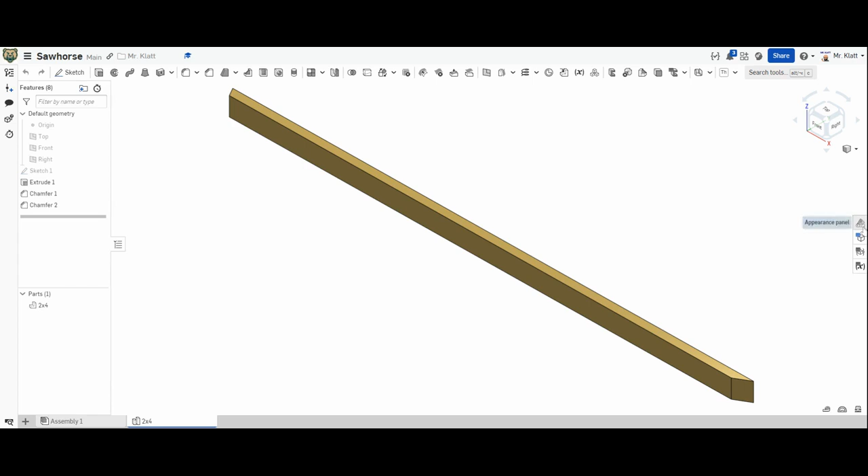So what I did is I started by creating a basic 2x4. And as you'll see, it measures 3.5 by 1.5, which is the actual dimensions of a 2x4. And then I also did add some chamfers because that's what we need for the legs if you saw in the original picture. Now I'm going to show you how to use just this one part to be able to create the entire assembly for the sawhorse.

So we're going to go to configuration on the right side and we're going to choose list. And this is where we're going to put different configurations for different lengths. So I'm going to go ahead and name the top one here. Let me just highlight it here. We're going to call it ridge. And then we'll call our second option leg because it is only a two-piece item. We're just going to stick with those.

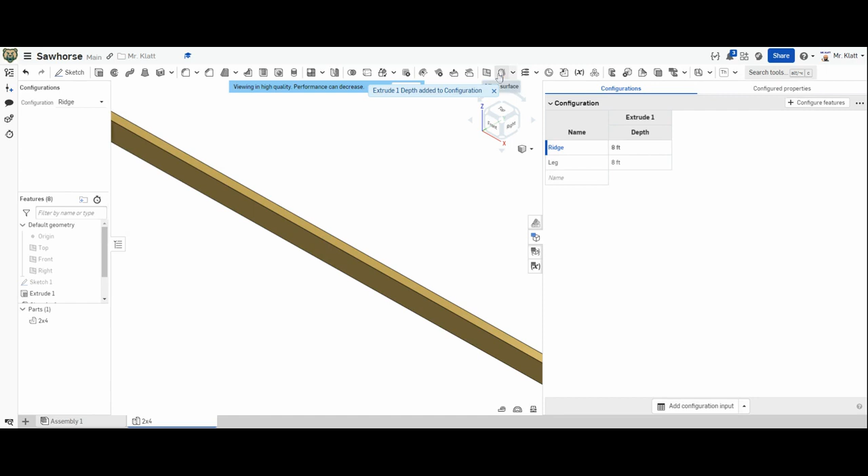Now we're going to configure features. So this is where we tell it what it's driving. So we're going to select our extrude and choose our depth. You just do a single click and click done and it will add it. And now we can change that dimension here. So I'll change ridge to 36 and I'll change my legs to 24. And now we can select and it'll change the size of our object, okay?

Now we still have our chamfers and it will keep those chamfers unless we tell it to shut them off. So what we're gonna do is create a checkbox, and we're gonna call it chamfer because it's very simple. We're gonna create a checkbox, which means we can shut those chamfers off.

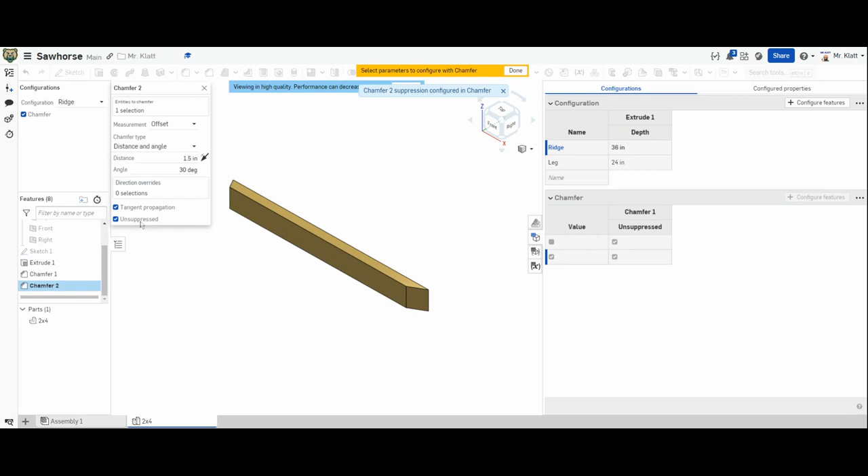To do that, we'll configure features, go over to chamfer 1, and select unsuppressed. Suppressing means making it disappear from the file. And then we're going to choose chamfer 2 and click unsuppressed again. So that way when we click that checkbox, it gets rid of both of them at the same time. And we'll uncheck the top two. So when it unchecks, it will appear and disappear.

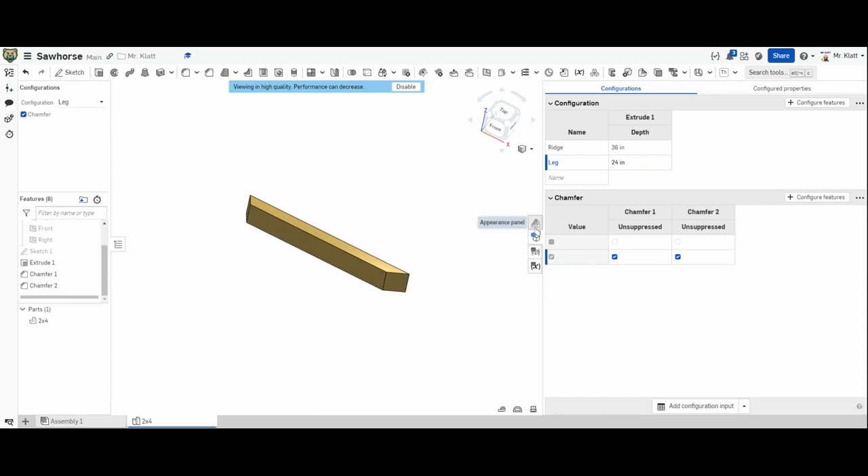So now we'll go over to our assembly and we'll start bringing in our parts. So to insert, we can select our part and we can pick our configurations and whether we want a chamfer or not, and then click generate. And then we can bring in that piece. So now I can change it to the leg, add the chamfers, and generate it, and then I'll bring it in 4 times because we need 4 legs.

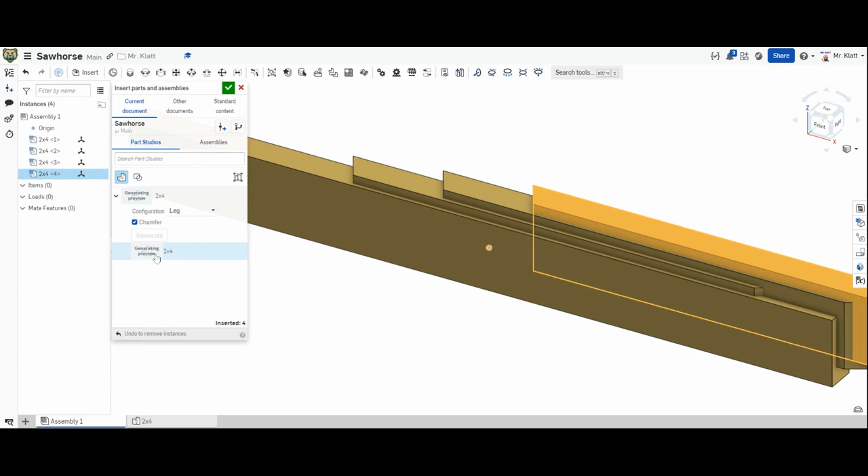So now we'll start the assembly, which I'll speed up because I've gone over assembly before. So we're just going to fasten mate all 4. And then I'm going to hide my origin point just to get it out of the way.

Now, how do we configure the BOM table to list it as separate parts? To do that, we're going to go back to our part and we're going to go to configured properties. And then we'll add a property and we'll do a description. While it loads here. Yep. And then we'll type in basically the name that we called the configuration. And that'll help it bring over to the BOM table.

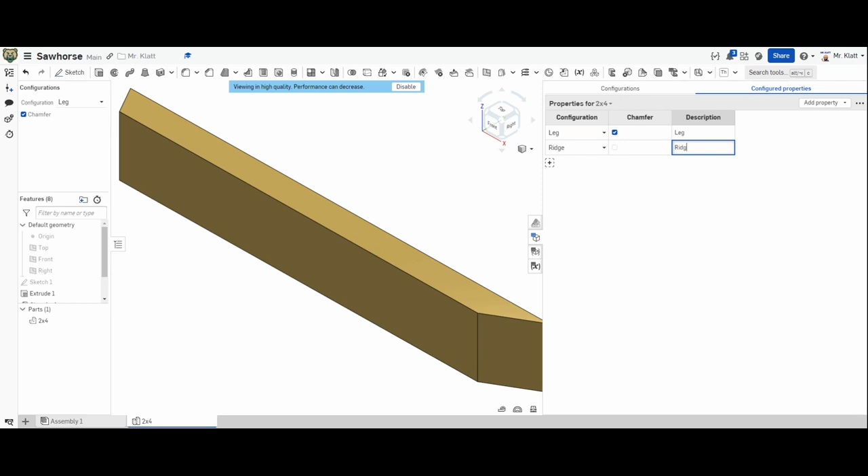At this point of the recording, unfortunately, they can't bring configuration over to the BOM table, so we do have to tell it. And we do have to choose the settings, so make sure you do uncheck chamfer for ridge. That way it knows when it's unchecked and it's ridge, then that's what you should name the description. So now we have our description in there.

And we'll get rid of our part number, and we're going to bring over our name because we did call it a 2x4, and that would tell you as a build list what to call it.